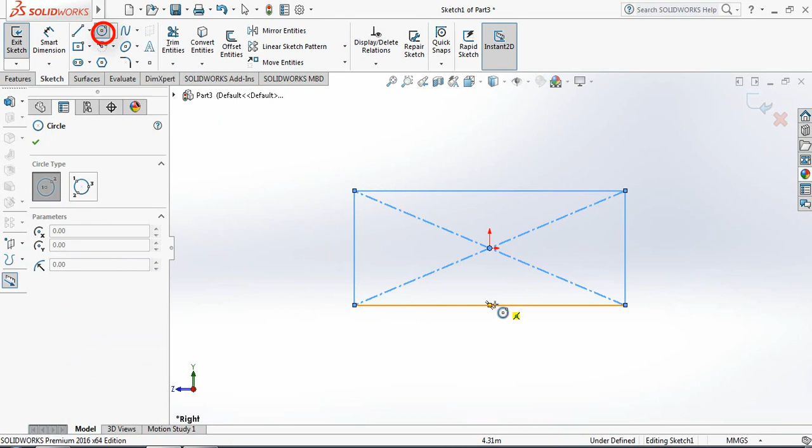So let's begin. First click here, then click on Part and click OK. Here our unit is MMGS, millimeter gram second. Go to sketch, select the right plane, then select rectangle and draw a rectangle. After that select circle and draw a circle from this point.

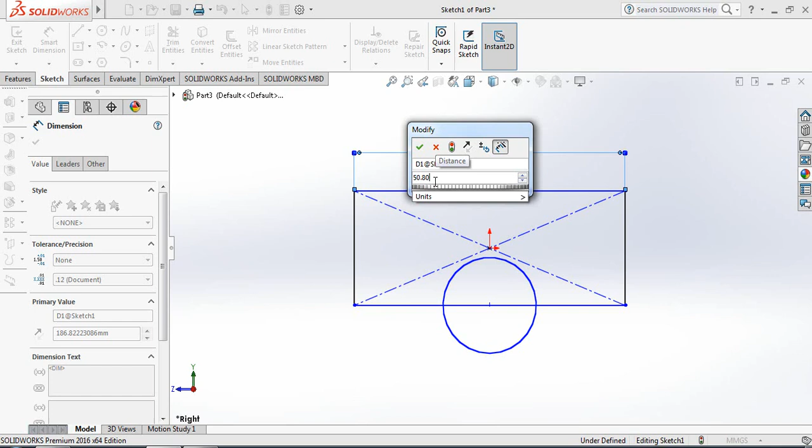Now click on smart dimension and take this dimension as 50.80. Now take this dimension as 19, and the diameter of this circle is 25.40. Now click OK.

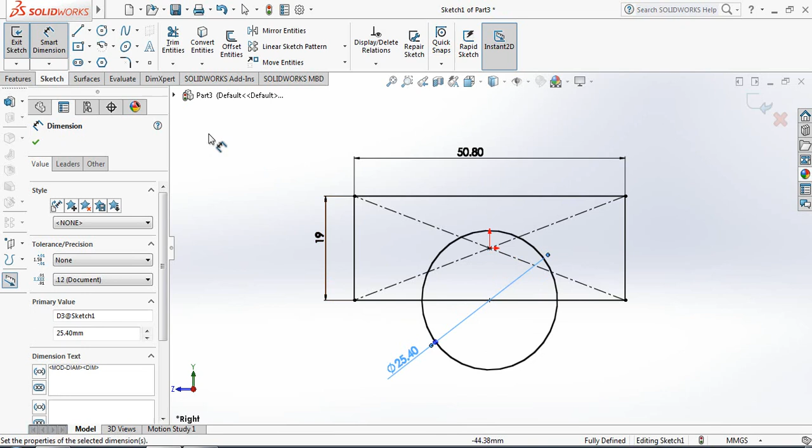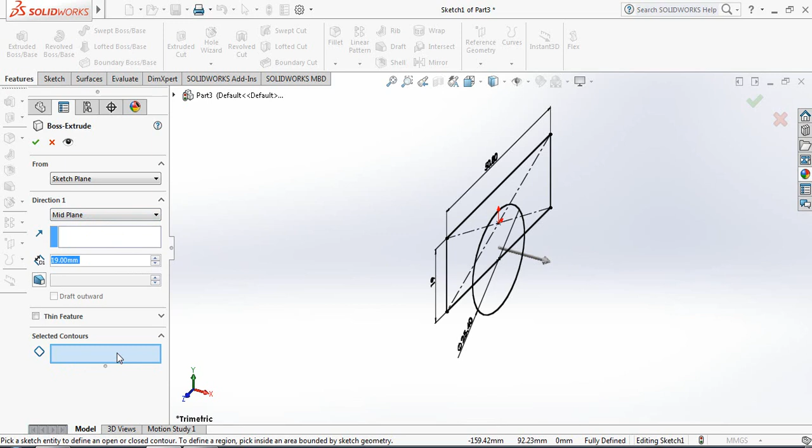Now go to Features, select Extruded Boss or Base, and from here select 19. Then select mid plane and click here to select the surface.

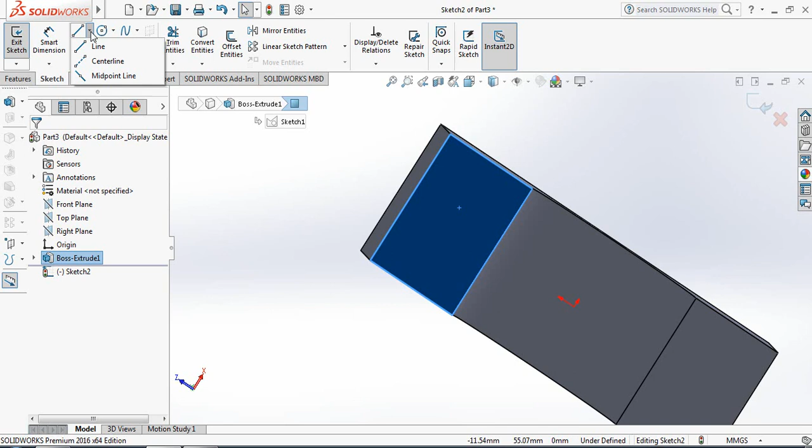Now click here and click on sketch. Click here and select center line. From this midpoint to this midpoint select center line, and here also select center line again, from this midpoint to this midpoint.

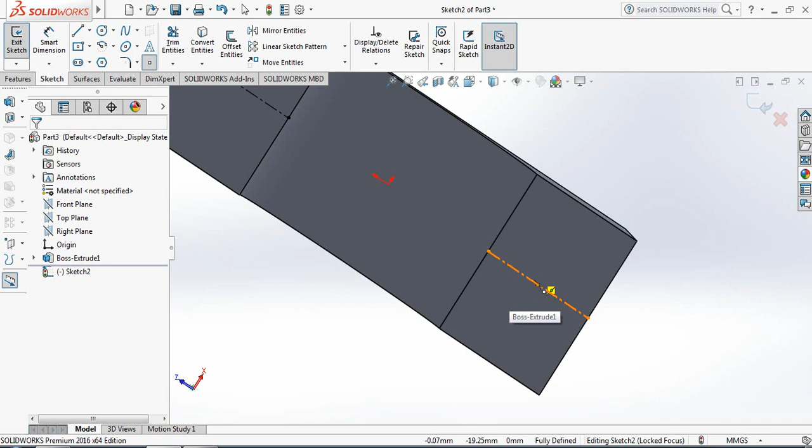Now select point, and make a point here at the midpoint of this line, and also here. Click here, click on spacebar, click OK.

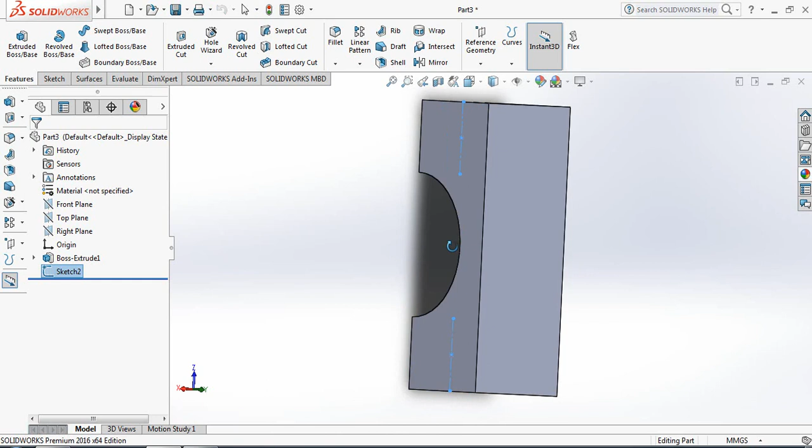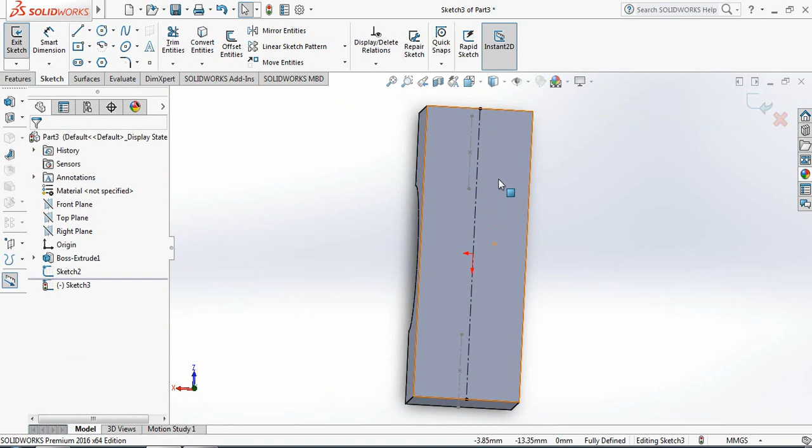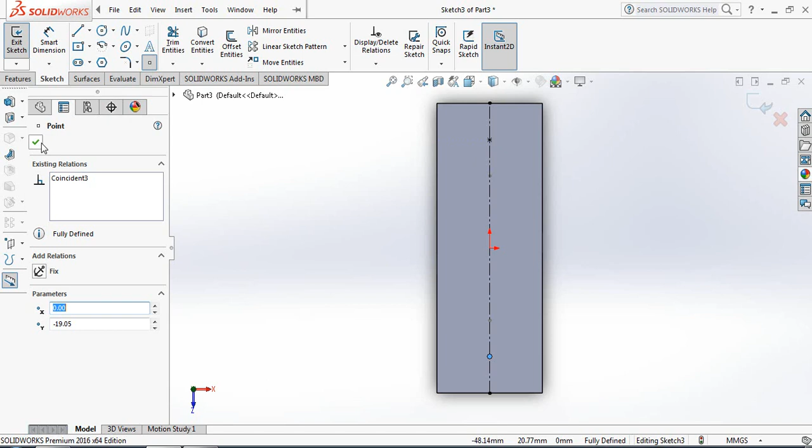Click here and click on sketch. Now select center line again, from this midpoint to this midpoint. Click on spacebar, click here. Go to sketch, select point, and select a point here above the previous point. Go to sketch, click OK.

Now select Hole Wizard and select the first one, and from here select ISO option. Then select the second one, hex screw grade AB ISO 4017. Size M12, fit normal, and show custom sizing. The first one would be 6.75, second would be 25, and the last would be 5.

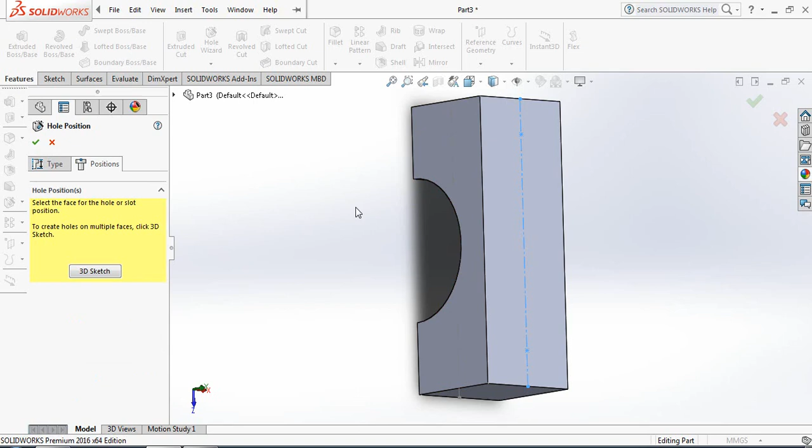Now click on Position, click on spacebar. Now fix it here at this point 1, and another one is at this point.